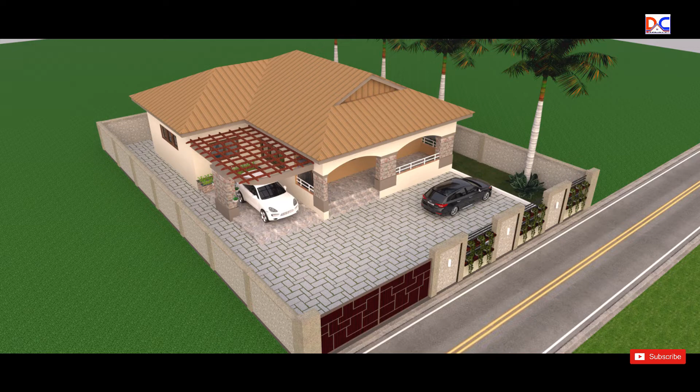A 3-bedroom house plan with a pergola carport and a stunning exterior for outdoor activities. In order to make it an ideal starter house for beginners, the architect judiciously designed the spaces so as to suit a limited budget.

The building has an area of 156.7 square meters with a construction budget of approximately $47,010. The building sits suitably on a land of size 24 by 18 meters and an area of 432 square meters.

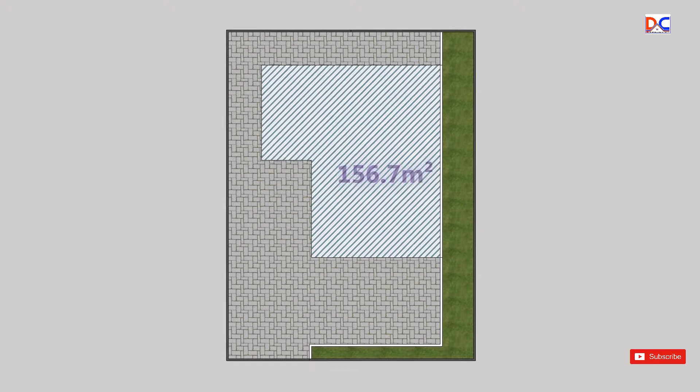The layout of the plan comprises a front terrace which ushers us into the living room. The kitchen and dining areas are beautifully merged together in the same space. There are 3 bedrooms and none is a suite.

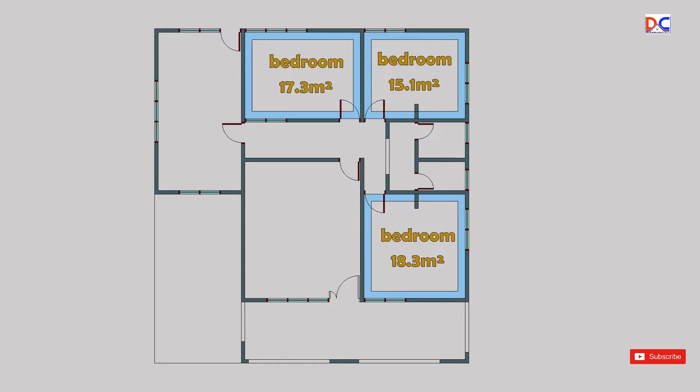1 washroom for both dwellers and visitors. A carport which is roofed with pergola.

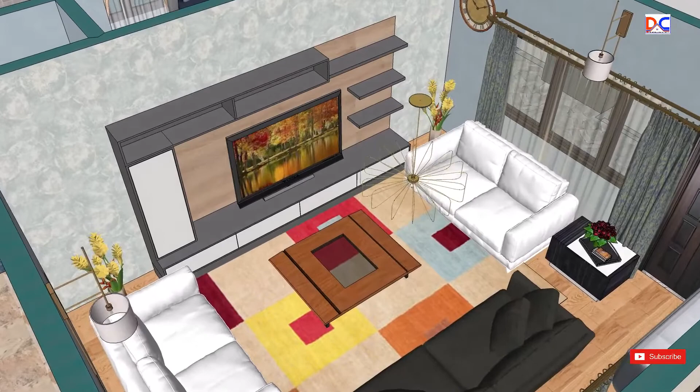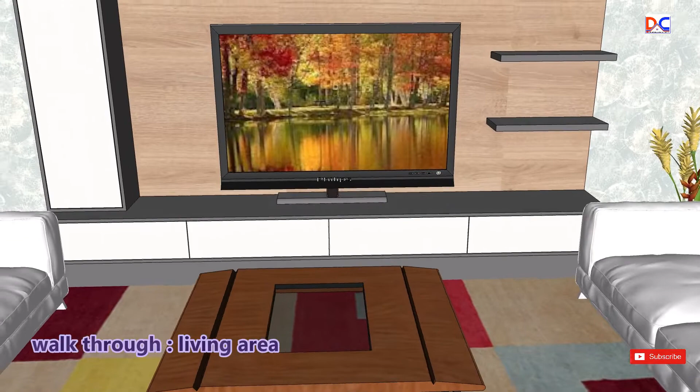Walkthrough. The living area. The living area, which is also the family common room, doesn't compromise on luxury and appeal.

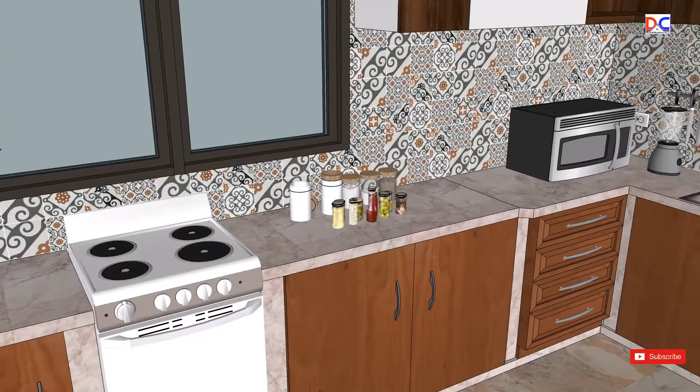Walkthrough. Kitchen and dining area. The kitchen is arranged with a functional layout, putting into consideration the stunning dining area which overlooks the carport.

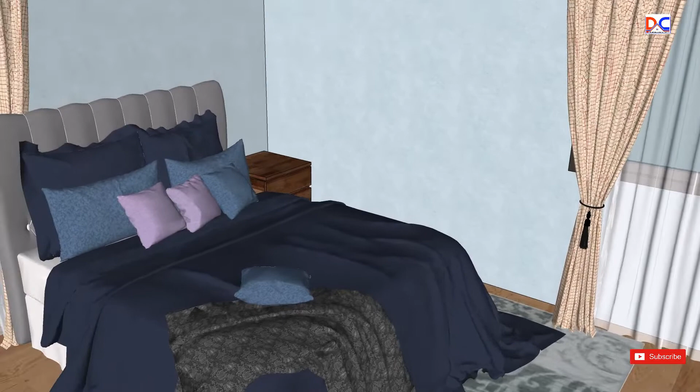Walkthrough. 3 bedrooms. Although none of the rooms is a master, all the rooms vary in sizes. This is the biggest of the 3 rooms, whilst the other rooms are equally spacious.